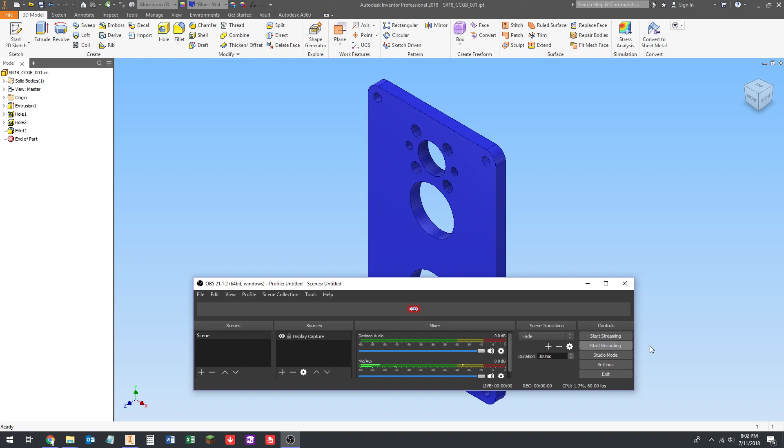Alrighty, we're back. Took a little break, got a drink of water, ate a bagel. Now we're back.

Okay, so I said in the last video that I was going to go right into modeling the standoffs and the other parts for the gearbox, but I realized I think it would be more valuable to go through more the process that I would follow in a season rather than what we did in the actual in-person class sessions. In the in-person class sessions, I just gave you guys the dimensions for the parts, and that was to save time, give you guys more time to actually work on some modeling. But here, we're not tied to a hard and fast time thing, so I would like you guys to see exactly how we go about determining these dimensions and how that will look in an actual build season design session.

So what we're going to do is we're actually going to download our off-the-shelf parts, at least a few of them. We're going to download the gears, the bearings and the motor. We'll leave the fasteners and some other stuff that we're going to need until a little later. I'm going to show you guys how to import those. We're going to save them, set all the materials, and then we'll work on modeling the rest of the parts.

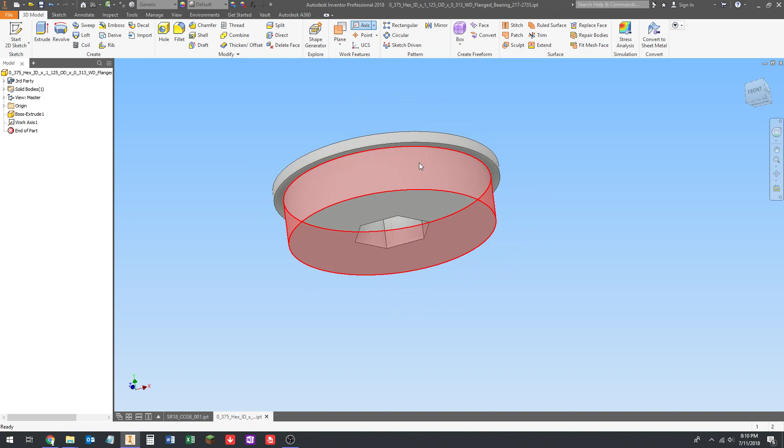Okay, so there's a little bit of prep that has to be done for each one of these files. This is the model of the bearing. I want a work axis that goes through the middle of it because it makes it a little easier to constrain to shafts and stuff. So I'm going to click Axis. Right here we're on the 3D Model tab. I'm going to click Axis. I'm going to find a cylindrical surface on this. I'm just going to use this cylindrical surface, and click. Okay, and it places this little orange line in the middle, and I use that orange line in assemblies to place constraints.

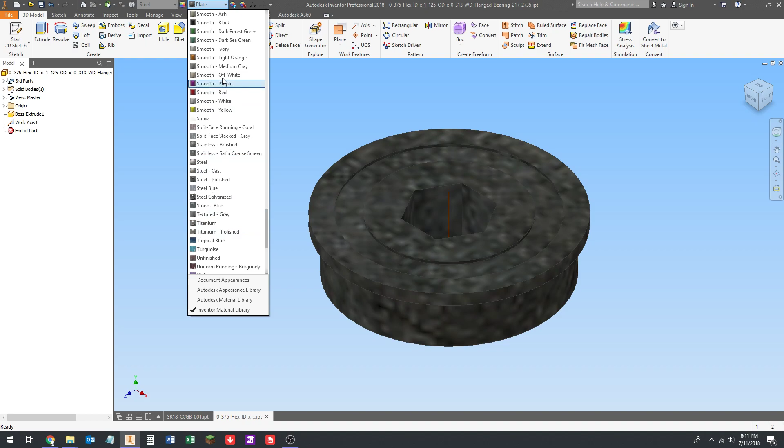Next, we need to set the material. So if we click the drop-down list up here where it says generic, scroll down until we get steel. Now Inventor does this really rough steel texture that just doesn't look good, and it's confusing when you're looking at it in assembly. So I typically reassign to something more polished. There's one that I like called semi-polished. Okay, and this looks more like what the bearings look like in real life. Alright, so I'm going to give this a save.

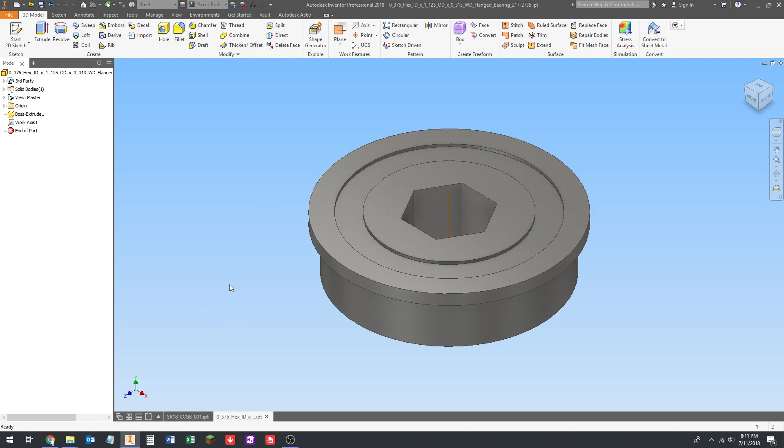Now, it didn't create the Inventor part until I clicked the Save button. So if I had closed out this part before I saved, I would have had to start that process over again. It does not create the Inventor file when you import it. It creates the Inventor file when you save it. So just keep that in mind. I'm going to close this because I don't need it anymore.

I'm going to go back and open again. I'm going to go to the next one. We've already done this one, so we're going to do this one. Open. Okay. Wait for it to import. Click OK. Delete the extra sketch. Place the center line. Change the, oops, clicked on the wrong one. Change the material. Ooh, what's going on?

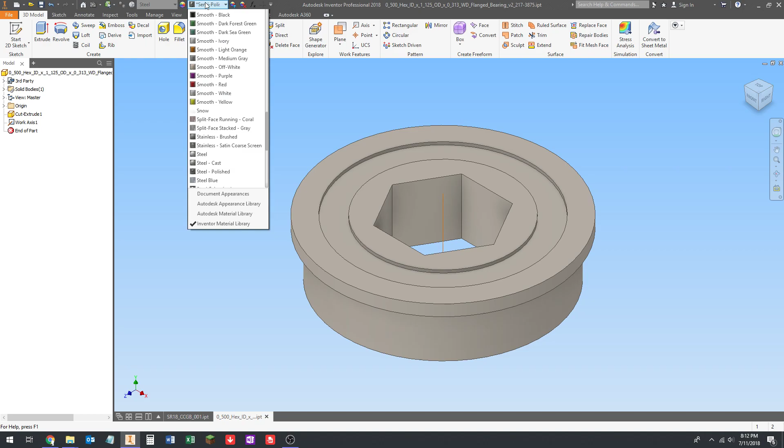That is strange. Let's go. Pick something else here. There we go. That was weird. Okay. Semi-polished. Yes. Okay. Now I'm going to give it a save. Close it. Open. Go to the next one. So you can do these pretty fast. Next one's this one. Open.

I'm kind of trying to talk about what I'm doing just because you can't hear my mouse clicks. I was hoping the mic was going to pick up the mouse clicks so that you could know when I'm clicking, but it doesn't. In the screen cap software I'm working, I haven't figured out how to do a little flash on the mouse when you do it. I'll figure that out later, but I'm kind of in a hurry to get these videos done.

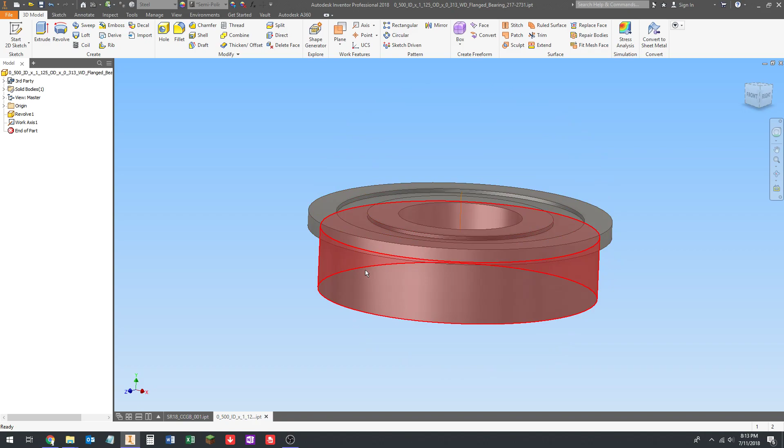So, steel, semi-polished. Let's save. And the reason we're setting the material is so that we get a somewhat accurate weight. Now, if you really wanted to be accurate, obviously this bearing is modeled just as kind of a solid lump, right? And that's just because you don't need to model all the individual balls inside of the bearing. You don't need to model the inner race and the outer race. There's just no reason to do that.

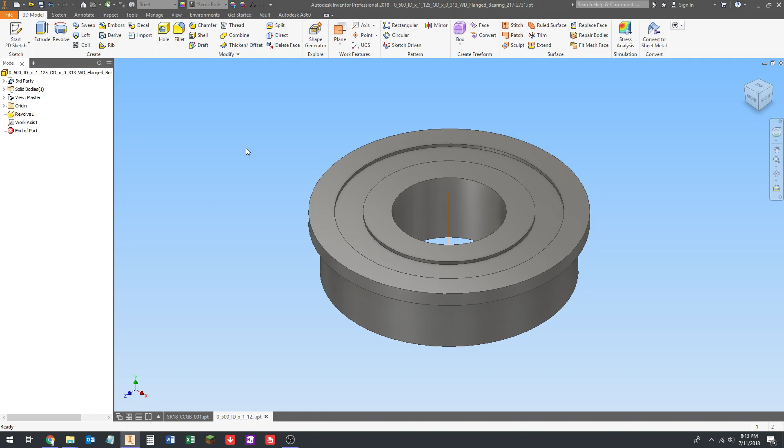But that means that the real bearing is made of a couple different kinds of steel, and it's hollow basically, and so the weight's going to be slightly different. So if you really cared a lot about the realistic weight of the bearing, you'd want to go in and set the material or the weight manually instead of letting Inventor calculate it automatically. You'd want to set it to whatever the bearing actually weighed. And I'll show you how to do that because we're going to have to do it for the motor. But the bearings are so light and the difference isn't that big that we don't care.

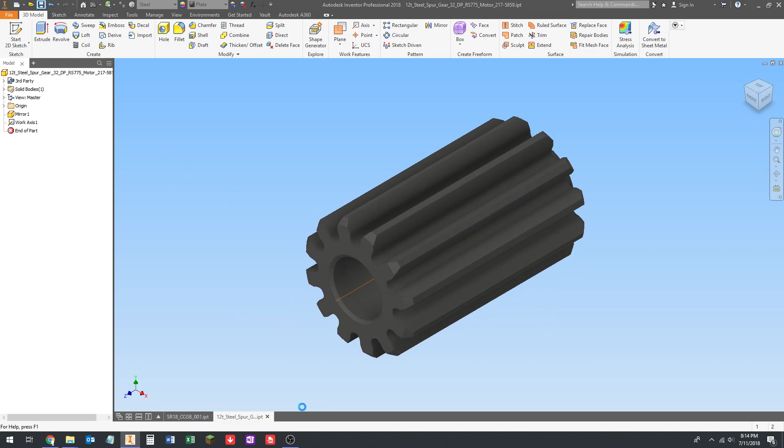Okay, so we just imported our gear. These are going to be a little bit different because, well, no, this one's actually not, because this is steel as well. I'll delete the sketch, place the work axis, set the material to, oops, I said it wasn't aluminum, steel. Okay, I'm not going to change the appearance on this because this is pretty much the color that the gear actually is. It's kind of black. Give it a save. Okay, open. It's going to be the 16-tooth aluminum.

Okay, so this one, a little different in terms of what we're going to do here for materials. So delete the sketch. Now, this one's a little weird because the hex, it's not round on the outside. Obviously, I can't place this work axis on the hex, so I've got to find a cylindrical surface, right? And it doesn't matter what cylindrical surface it is as long as it's concentric with the center line of the gear. So I have a few options.

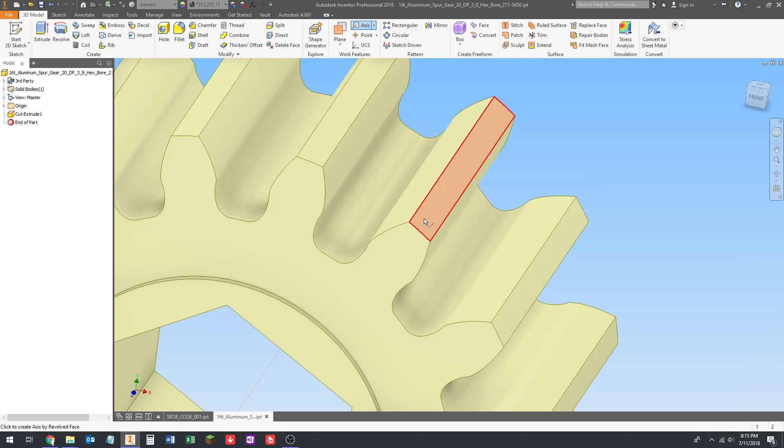First of all, the ends of the teeth happen to be a cylindrical surface. It looks like it's straight, but it is actually curved, and the center of that curve is the center line of the gear, okay? The other option is this little hub, little boss on each side. That's a cylinder on the outside. So that's what I'm going to use, but it really doesn't matter what you choose. As long as you get a center point, you're good to go.

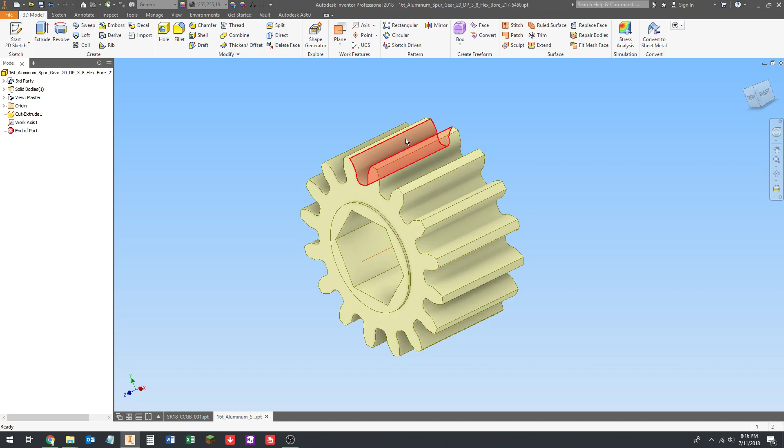Okay, so now gear models from Vex come in with a color, right? You can see up here, you've got these numbers. It's the RGB value of the color of the gear, and it's not one of Inventor's materials, and it's not default like the bearings were. So normally when you pick a material, Inventor automatically changes the color. All right, but if there's already a color associated with the step file, Inventor won't do that. So I will get back to that in a second. I'll show you how to override the default color and get rid of it so Inventor can specify the color. So we're going to click this drop-down list.

So if we go to, there's these different libraries down here. I typically use the Inventor library just because it has a few basic materials, but if I'm doing something that needs other materials, there is this other material library, which I hardly ever use, but it does have a bunch of different kinds of aluminum, including 7075.

Okay, so we want to get rid of the default color. So if you go over here to solid bodies and you click on the little arrow, okay, that expands it. Then you see where it says solid 1, right click on that, go down to properties, okay, and you get this dialog box. Now you need to do two things.

So you're going to click this drop down box, you're going to scroll all the way up, click as part, and then you're going to click clear all overrides. Then you're going to click OK. Okay, and you'll notice all of a sudden Inventor automatically picked an appearance when we picked aluminum 7075.

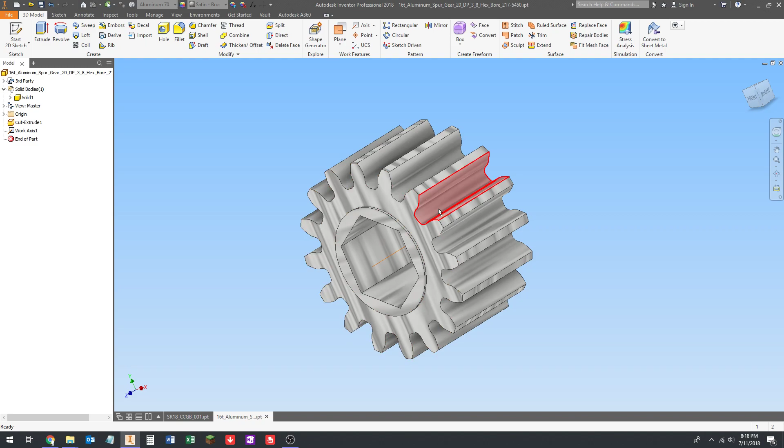Now this is a pretty ugly color, and I don't like it, so we're going to change it. The coating that's on those gears makes them kind of beige. So actually the default color would have worked. You know, it's pretty close to what this was, but we're going to go ahead and change the color anyways, just so that you guys can get the practice.

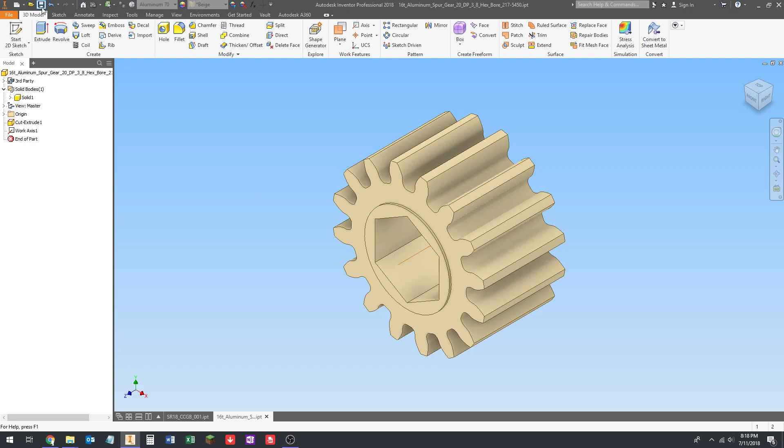So we're going to save that, close it, go to the next one. And now the remaining gears are going to be the same material and the same color, just for simplicity. I think the 32 DP gears might be a slightly different color. I don't quite remember. So delete the sketch, place the work axis,

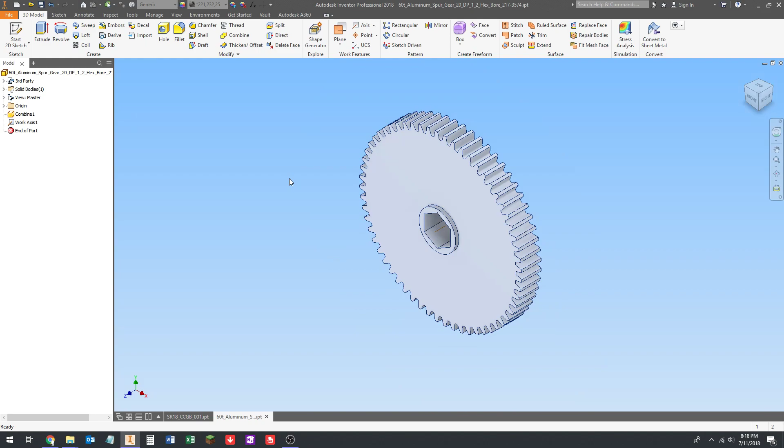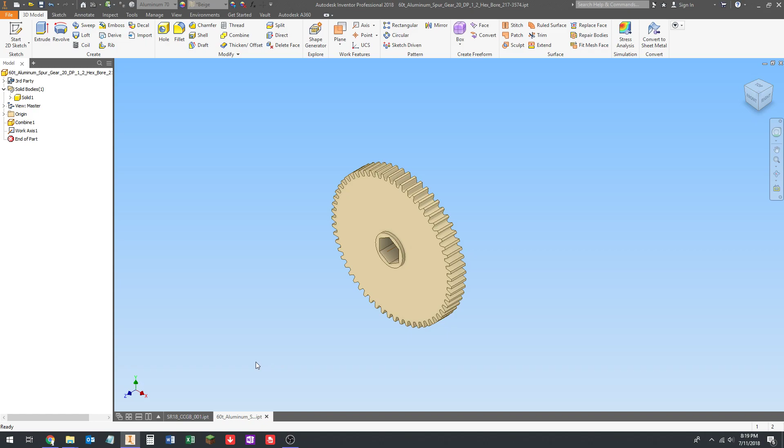set the material, change the override, set the appearance to beige, and save. Close that. Okay, we got one more gear. Open that. Click OK. Delete the sketch. Place the axis.

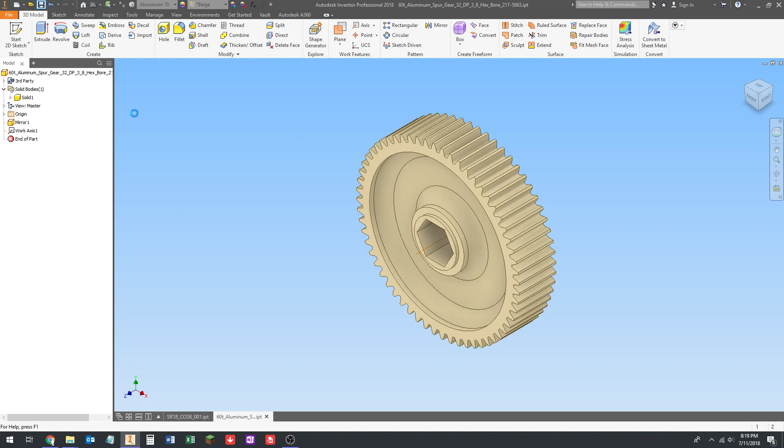Okay. Change the material. Expand that. Right click on solid 1. Go to properties. Go to as part. Check clear overrides. Click OK. Select the color we want. Save.

Alright, now one last imported part. It's going to be the 775 Pro motor. So in this one, okay, I'm going to go ahead and set the material to steel, and I'm actually going to go to the Inventor material library for this because I don't care about the alloy. The motor. Well, all right, let's look at this here for a second. The motor is modeled as a solid block.

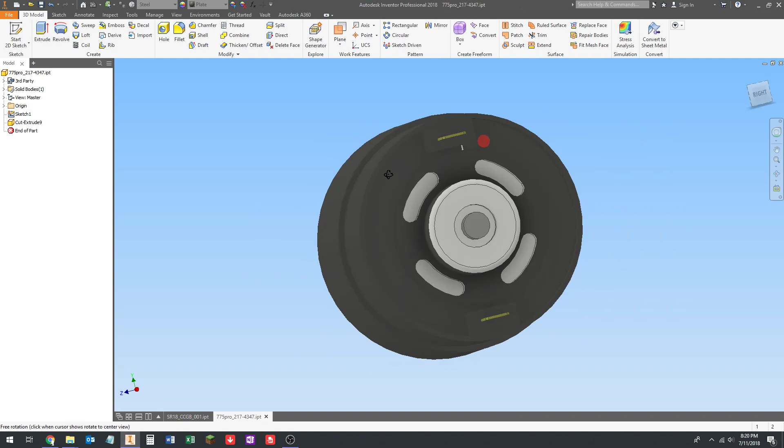Now, in reality, the motor is not a solid block. There is empty space inside of the motor, and in addition, there's a significant amount of other materials. There's a lot of plastic parts in the motor. There's a significant amount of copper in the motor because of the windings. There's different kinds of steel. You've got bearings that have empty space in them. So the bottom line is, modeling this as a solid lump of steel is not a good way to accurately represent the weight of the motor.

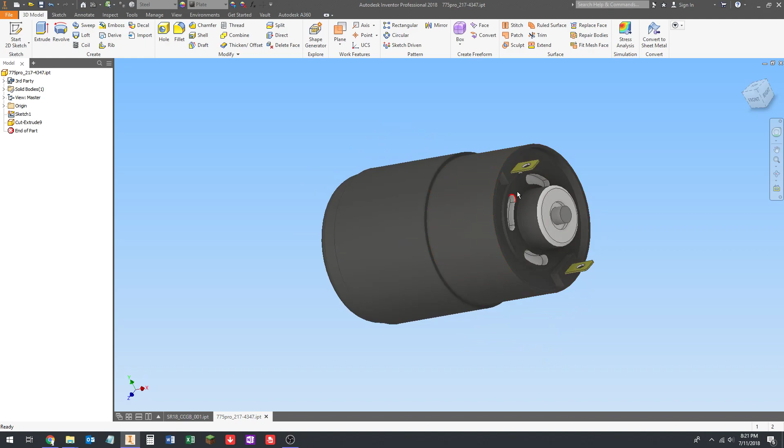So what we've done, we've selected the material. We're going to leave the appearance alone because it's nicely colored when it comes in from Vex, and you've got the brass or copper connections there, so it looks nice. We're not going to change the coloring at all because I like the way it looks. But we do need to change the weight manually. We set it to steel just for consistency, but we're going to have to manually override the weight to make it what we want.

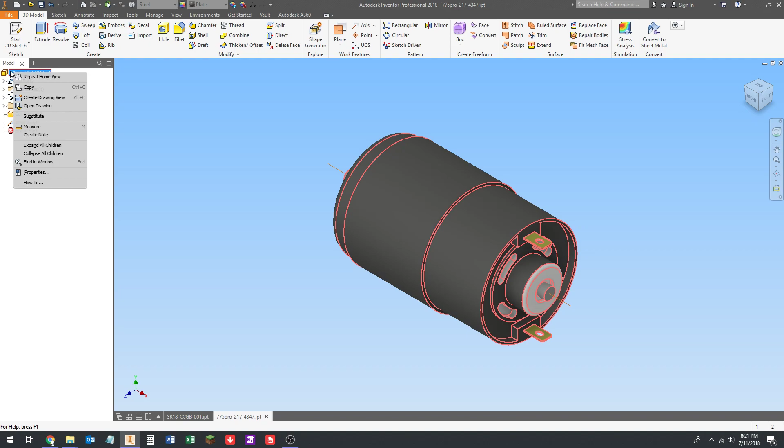So what you do, I need to do a couple things here first, actually. Delete the sketch, and I'm going to place the centerline axis on this as well for constraints. Okay, so to manually override the weight, we're going to go up here in the browser, right-click on the title of the part, the very top, go to iProperties, go to the Physical tab, and we're going to update.

Okay, now if this was as modeled, a solid piece of steel, it would weigh 1.657 pounds mass. Now in reality, this motor is 0.8 pounds, according to Vex's website. I can pull that up, go back to the website and go to weight. It says 0.8 pounds. So what I can do here is manually override this box and type in 0.8, and hit update again, and it will set this to that weight.

And now it's manually overridden. It's going to stay this way. If I go in and update again, it's not going to change. Now, if I want to go back to the default weight, you just delete the text out of here and update again, and it'll go back to its automatically calculated weight. So you can flip back and forth if you need to.

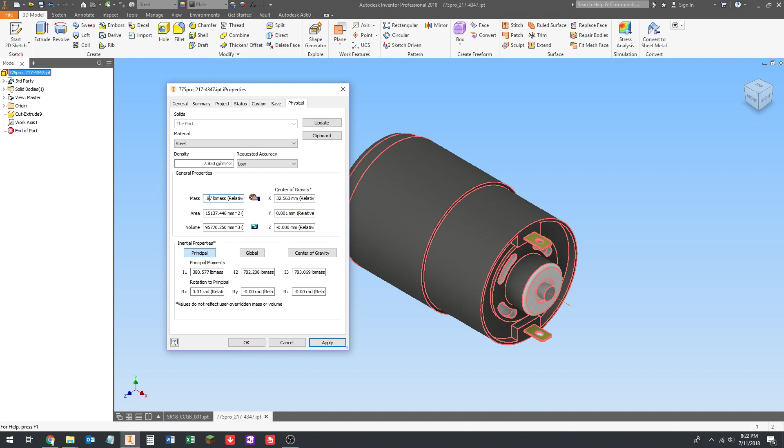But 0.8 pounds is what we want. Update. Click OK. Okay, so now when this is put into an assembly, it'll show up as the correct weight. So we're going to save this, and we are done importing parts for now.

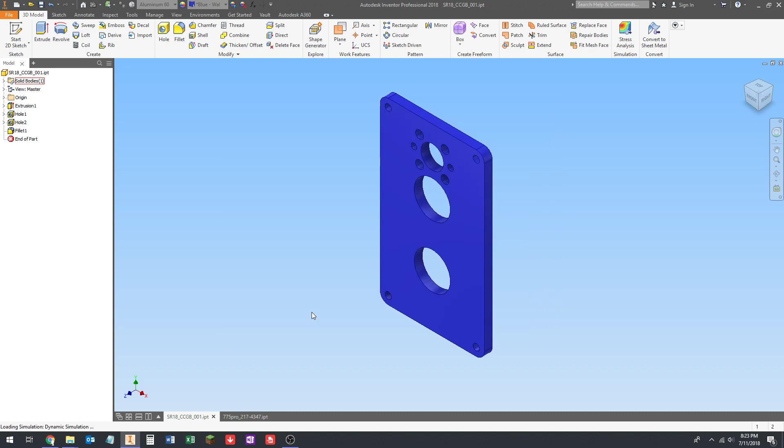Okay, so what we're going to do next is we're going to use some of the imported parts that we have available to us at the moment to start assembling. So we're going to go up and click New, and we're going to go to standard.iam, which is the standard assembly template. We're going to click Create, and once it loads, we're going to be presented with a blank assembly.

So we're going to go up and we're going to click Place. We've got to place parts in here. We did this a couple weeks ago in the class, but I'm going to kind of go over the basics here again. I'm going to browse to my parts. I find it helpful to look at large icons because Inventor gives me a nice preview and shows me what the parts are. So we want to start with our plate.

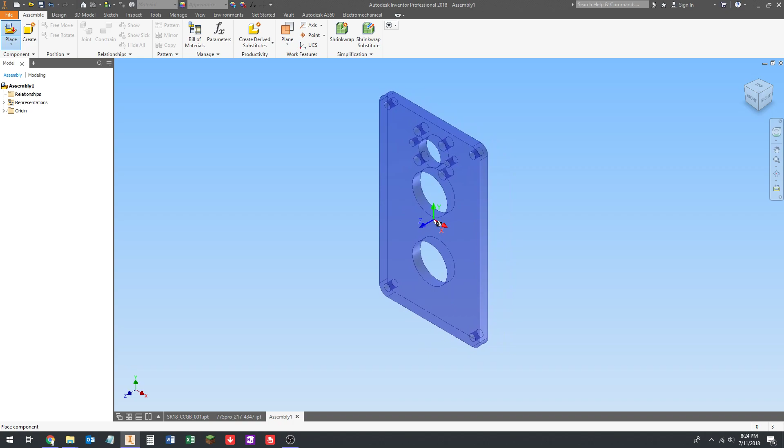In the class about assemblies, we talked about grounding your parts, and the first part you place should typically be the one you ground. So we're going to select this part. We're going to click Open. I need to zoom out a little bit here. This orientation is fine, so I'm not going to rotate it. Now I'm going to right-click, and I'm going to click Place Grounded at Origin. Now this part's grounded. It can't move. Everything else in our assembly is going to be based on this plate.

Now there's two plates in the gearbox that are going to be separated by a couple inches or something. So I'm going to just place another one down here, and they're not really aligned, but we got two plates. So now I'm going to hit Escape. I'm done placing parts. Now this part can move around. This part cannot move around. This weird highlighting thing is a setting that I have changed myself. It makes it a little more convenient to work, I've found. So when you select something, it won't look exactly like this, but don't worry about it.

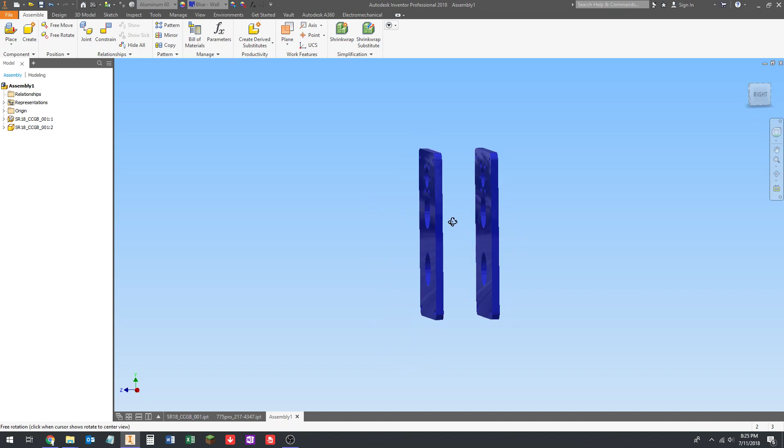Now the big point that I wanted to make was we don't know the distance between these two plates. We don't have any way to know that right off the bat. Now we could sit down and maybe figure it out, but it's easiest for what we're doing here. We can kind of use Inventor to help us figure out how wide it needs to be.

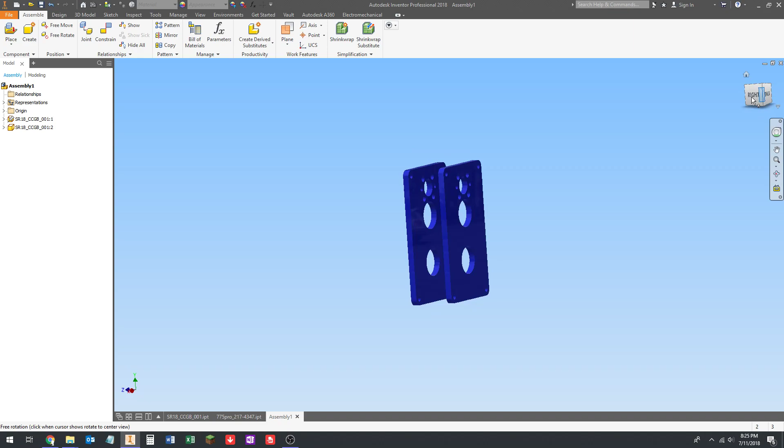So we're going to start assembling, and we're not going to know how far apart these two plates are. Right? We don't know how long the standoffs are. We don't know how much space we need. We're gonna make this as thin as we can, while still having room for all the components. So we're gonna start assembling, and we'll figure that out a little later. So we're gonna start by placing in our motor.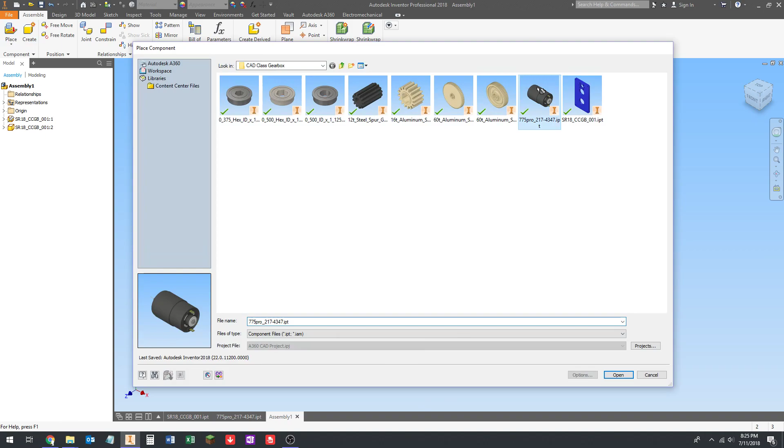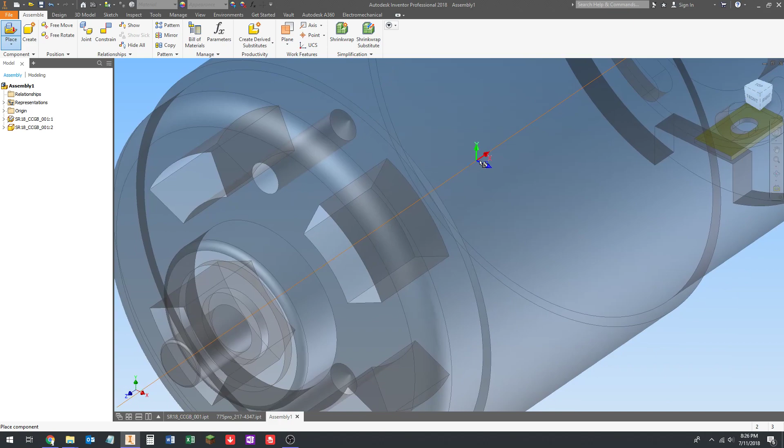I'm gonna rotate this to be a little bit more convenient. Remember, the rotations obey the right-hand rule. So positive 90 degrees around the y-axis. We'll rotate the motor like that. Now we want to roll the motor to make the two bolt holes, which you can see right there, horizontal. So we're going to do a rotation in the x-axis, and that flips the motor kind of upside down.

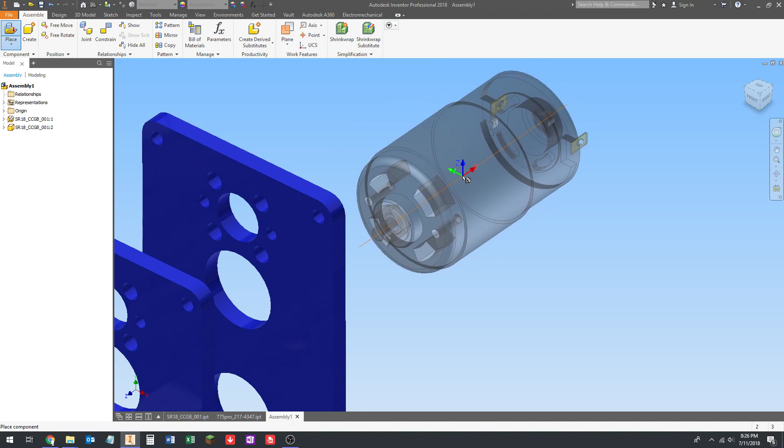Now you can see the origin right where my mouse is. The motor's really upside down. There's no reason that that's a problem, but typically I just rotate it 2 more times to flip it upright. So the holes are still horizontal, but the origin is the way that makes more sense. There's no real reason for that. It's just what I do. So we click just anywhere, place that down, then I press the Escape key because I'm done.

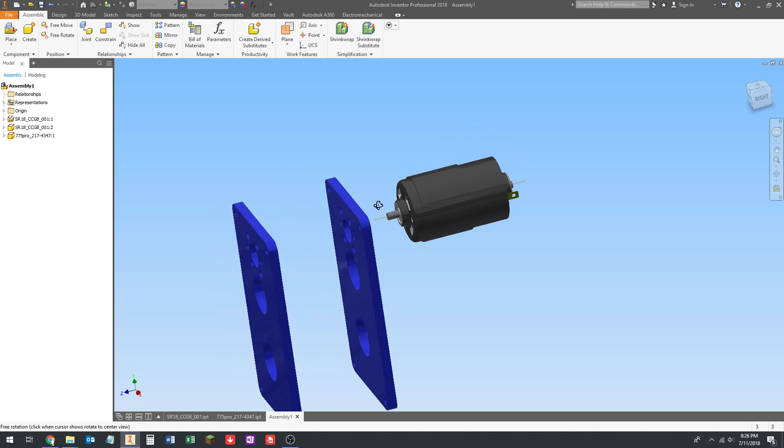Okay, so now we're going to constrain it. So we need to do a couple things. We want the center line of the motor, which is represented by this work axis that I created when we imported the part, to be centered on this medium-sized hole here. So we're going to go up and click the Constraint tool. This dialog pops up.

We're going to click the work axis, and then we're going to click the inside of this hole. And you'll notice the motor jumps and lines up with it. We'll click the Apply button. You can also hit Enter.

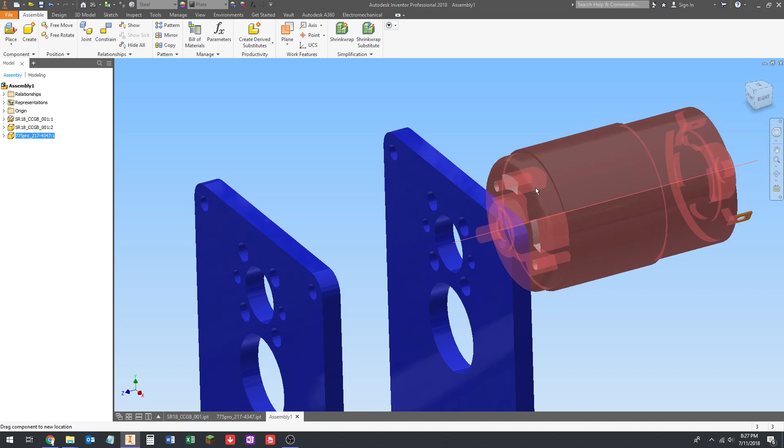Okay, so now if I lined my holes up correctly, I did those holes from memory, so we will see. Well, let me show you here. So I'm going to press the Escape key to get out of the Constraint tool. This motor can move in and out, and it can rotate. Okay, we want to prevent both of those things, so we need two more constraints.

So we're going to line up one of these holes with one of the screw holes in the plate. Okay, so we're going to click Constraint. We're going to go in and select the inside of this cylindrical hole surface. Go in and select the inside of this hole surface. That'll line those two up. We're going to click Apply.

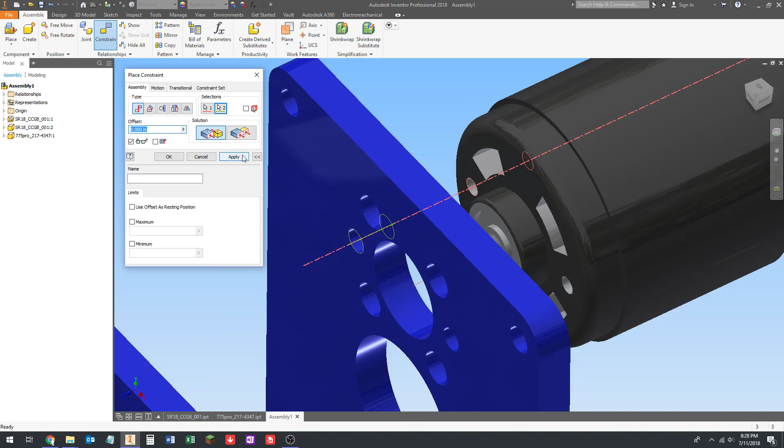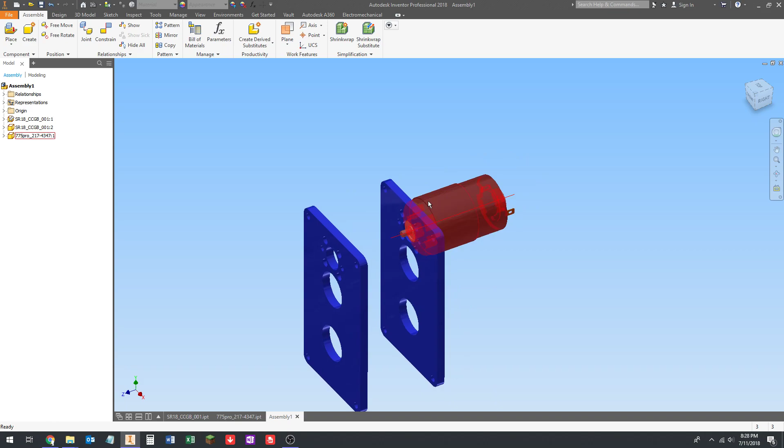Then we're going to click the front face of the motor. That's one constraint. We're going to rotate around. We're going to click the back face of the plate. And we're going to click Apply. Okay, now if we escape out of the Constraint tool, we can't move the motor now, right? I'm clicking and dragging it, and it won't move. That's good. It's fully constrained. It's locked in place.

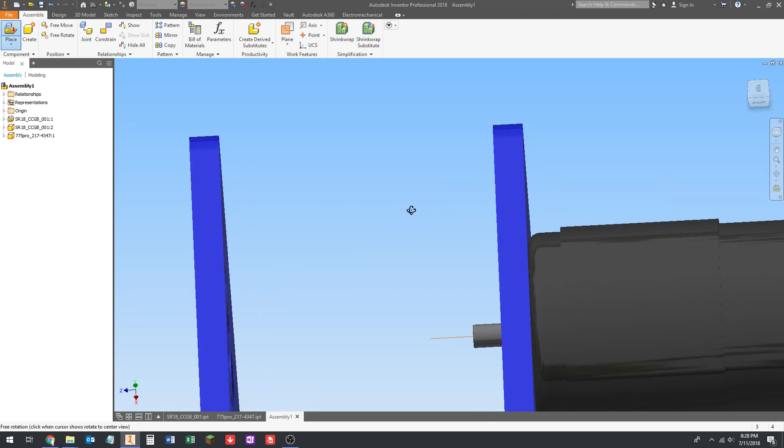Okay, so now there's a gear that goes on this shaft. So let's go up to Place, and let's get the gear, which is this guy here, and click Open. Okay, now the gear does have a back side, so you can see here, if I look at it from the side, you can see the little hub that's right there on the right side, the little bit that's sticking out beyond the gear teeth. That side faces the motor. Okay, and that just helps space the gear away from the motor a little bit.

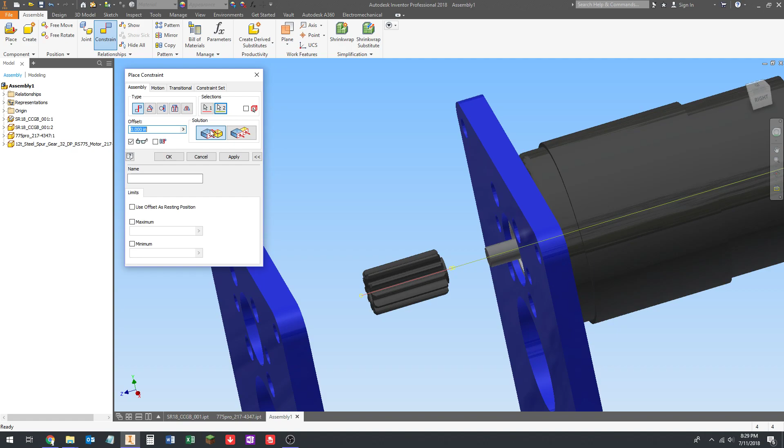So we're going to place this down just anywhere. It's just floating in there. It's not attached to anything. We're going to press Escape because we're done placing components. Now we're going to constrain this to the motor shaft. So we're going to click the Constraint tool. We're going to click the work axis on the gear and then the work axis on the motor. And that will line those two work axes up. Okay, we're using the mate constraint, which is the default one.

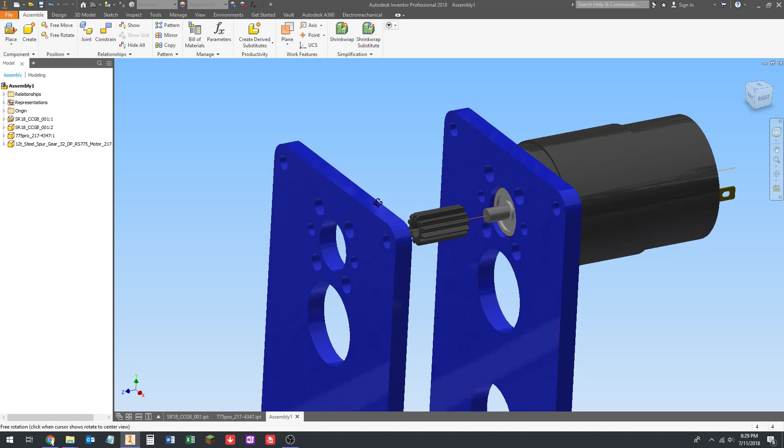Click Apply. Okay, so now we have 2 degrees of freedom, is what they call it. The motor gear, the pinion, can rotate and move in and out, just like the motor could a minute ago. So the first of these is easy to solve. We go to the Constraint tool, we rotate around, we click some flat face at the back of the motor, and we click this surface here.

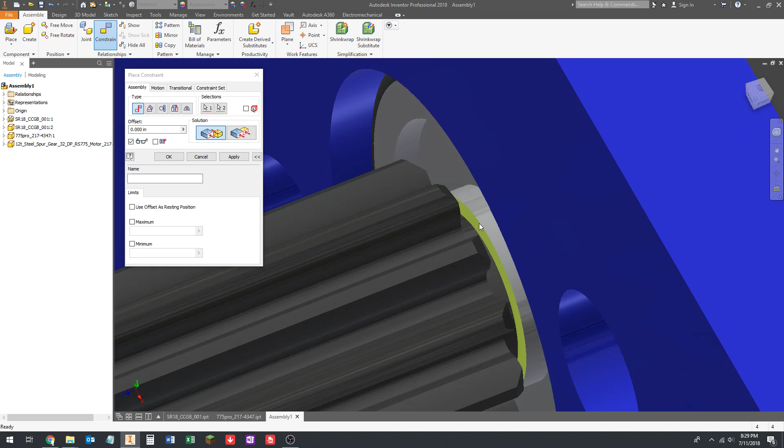Now this is a bushing, or maybe a bearing on this motor. I don't remember. But we don't want to press that all the way on, because when you press it on, if you press too hard, you can damage the bearing. So we want a small gap in between here, just a few thousandths of an inch. So I'm going to type in the offset box 0.01. That's 10 thousandths of an inch.

And that makes, it's hard to see, but it makes a small gap between these two surfaces here, which is more realistic. You don't have to do this. I mean, 10 thousandths of an inch isn't much, and this gear is going to be longer. You can kind of fudge gears side to side a little bit, especially in FRC, because it doesn't matter that much. But I do that just for realism.

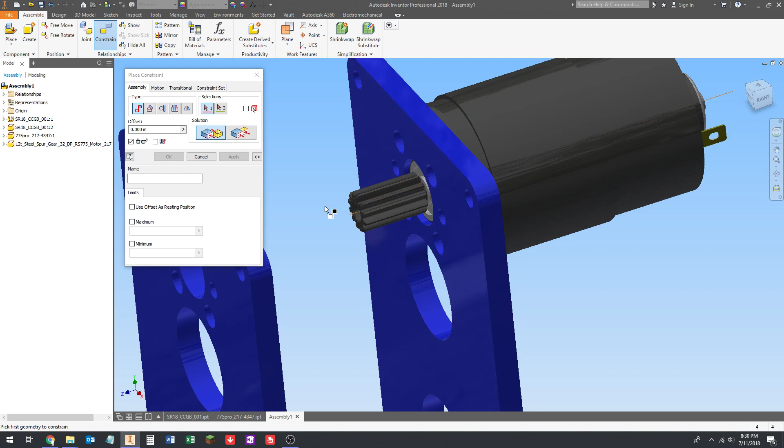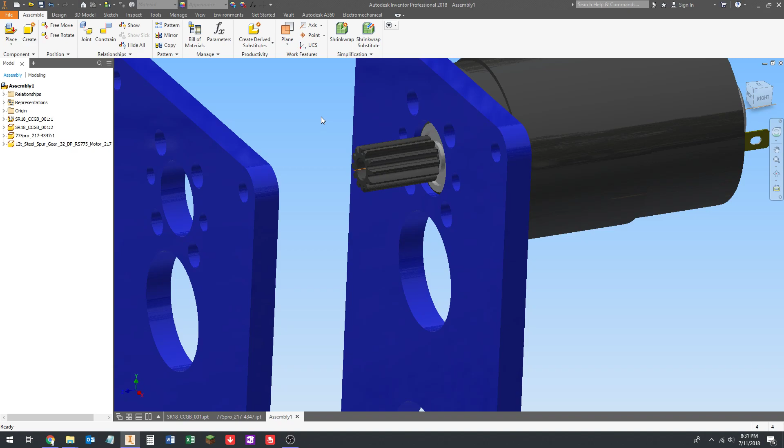Okay, now our gear can still spin, but we don't care. The motor shaft spins in real life. Obviously, there's no easy way to constrain this to stop it from spinning, and we just really don't need to. So I'm going to let it spin, and that'll be fine. That won't hurt anything.

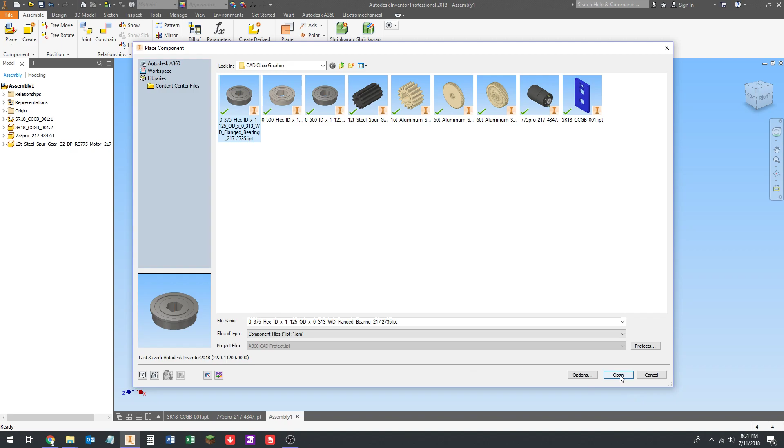Okay, so now we're going to go ahead and put bearings in these holes, the top 2 holes. So I'm going to click Place, or actually, I'm going to right-click and click Place Component here. You can do it that way as well. And then I'm going to find my 3/8 hex bearing, which is the one that goes up here. I'm going to open. So the flange needs to be on the inside of the gearbox, so I'm going to rotate once around the x-axis.

Remember, it obeys the right-hand rule. I'm going to rotate once about the x-axis. Now that puts the flange facing in, so I'm just going to kind of place this in here, right? That's the direction it'll go in, that hole there that it's kind of lined up in the viewport.

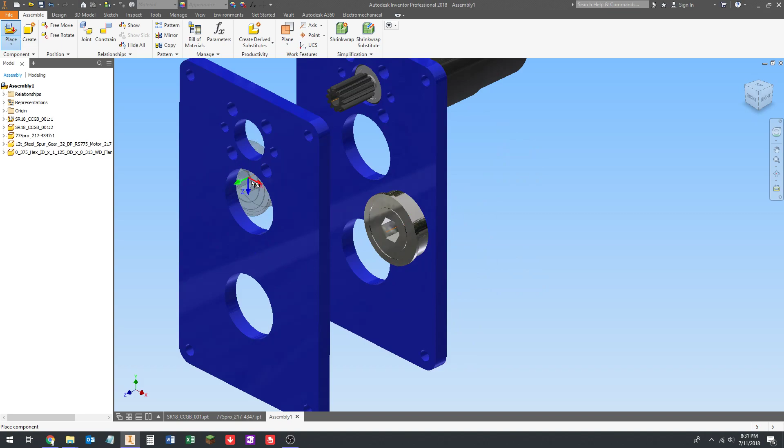Now the other bearing on this plate over here in this hole, oops, will be the other way around, right? The flange will also be in, so it needs to turn 180 degrees. So I'm going to rotate, well, I'll rotate by the Z-axis twice.

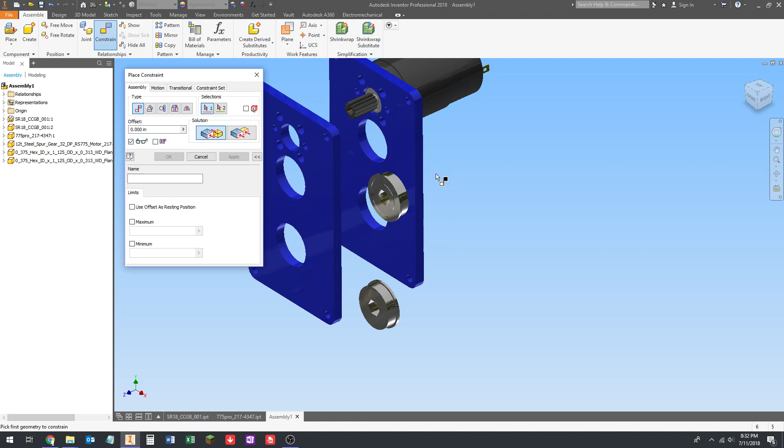That'll flip the bearing around. I'll place it down here. Then I'll press Escape to get out of that tool. All right, next I'm going to pick the Constraint tool. I'm going to pick the cylindrical surface of this bearing and the, oops, that's the wrong hole, the inside of this top hole here. Okay, line that up.

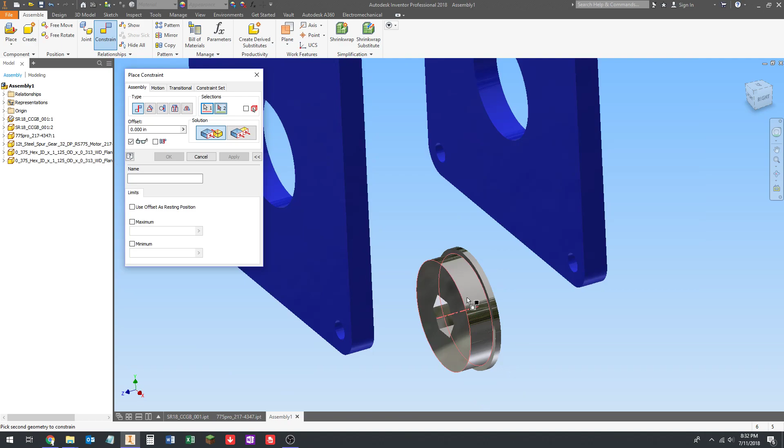Then I'm going to go to the other bearing and do the same thing, pick the cylindrical surface there and the cylindrical surface of the hole. So I need to be able to select the back side of this flange. And if I'm careful, I can get in here and get really finicky with it and zoom in and be able to pick the back, right? But if I exit out of the Constraint tool, I can just click and drag and pull this out, pull the other one out, and that'll make it easier to grab. Then I can go back in the Constraint tool and continue constraining.

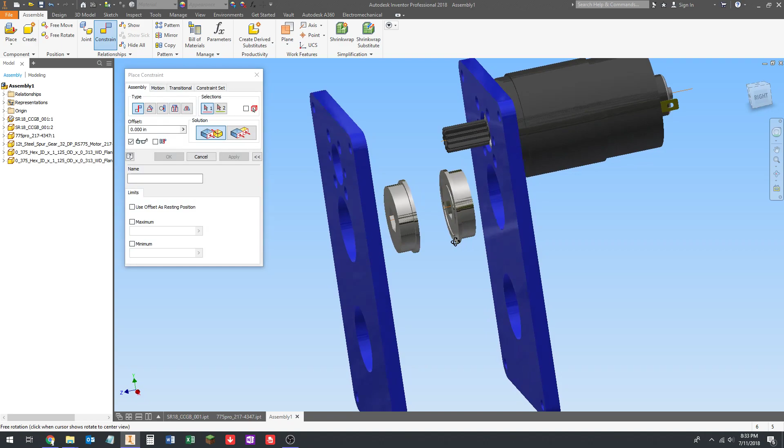Okay, so I'm going to pick the inside of the flange. I'm going to rotate, pick the front of the plate, click Apply, or press Enter. Click the back of this flange and the front of this plate, and press Enter. Okay, now same problem as with the gear, the bearings can spin. They can't move in and out, or side to side or up and down. They're constrained in the hole and on the plate, but they can spin.

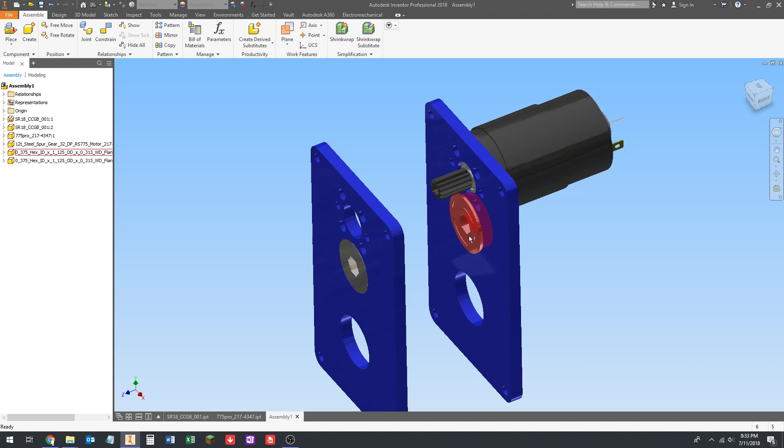That's fine. Same deal with the gear up here. They spin in real life anyways, and there's just no reason to go to the work to constrain it. It just slows down your model, and obviously takes time to do it. So no reason to mess with that. So those are our bearings.

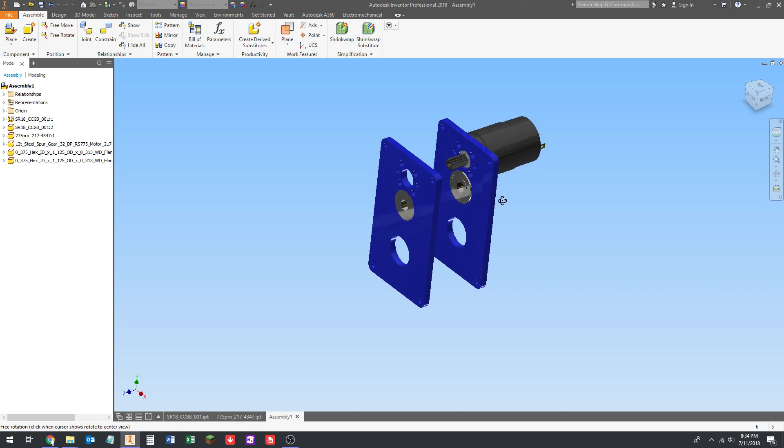Now there's a shaft that goes in here, right? There's a piece of 3/8 hex shaft that goes in here, but we don't need the hex shaft in here to constrain the gears. So we're going to go ahead and place the gears for this cluster shaft in this assembly, and I'll show you exactly how that works. And this is a workflow that I would use during the season pretty typically.

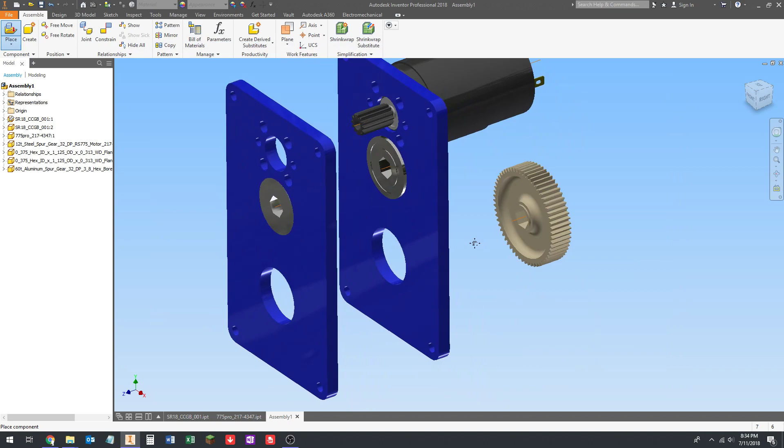So I'm going to go to Place, and I'm going to grab the 60 tooth 32 DP gear, which is this guy. Place that down. I'm going to hit Escape. I'm going to go up and place another component before I start constraining. And I'm going to grab the 16 tooth 20 DP gear, place it down as well, and hit Escape. So now I'm going to go to the Constraint tool. You can also hit the C key on your keyboard for the Constraint tool if you want.

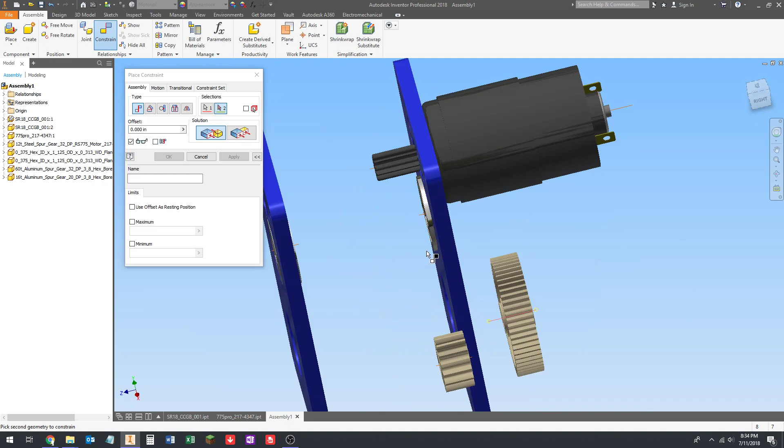So I'm going to pick the work axis there and connect it to the work axis there. There's no shaft in there, right? But I'm lining the centers of the gear up with the centers of the bearing, which is the same thing. And I'm going to line the center of this gear up with the center of this bearing using the same method. And I'm just pressing the Enter key after placing each of those constraints because I find it a lot faster. So I'm going to exit out of that with the Escape key, pull these out so I can get to the back.

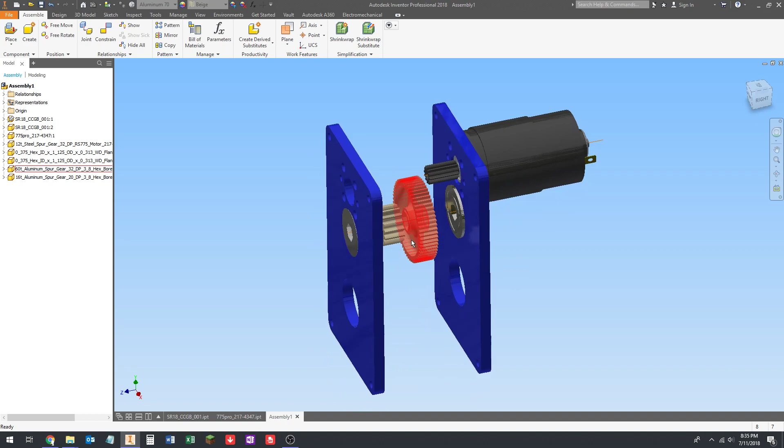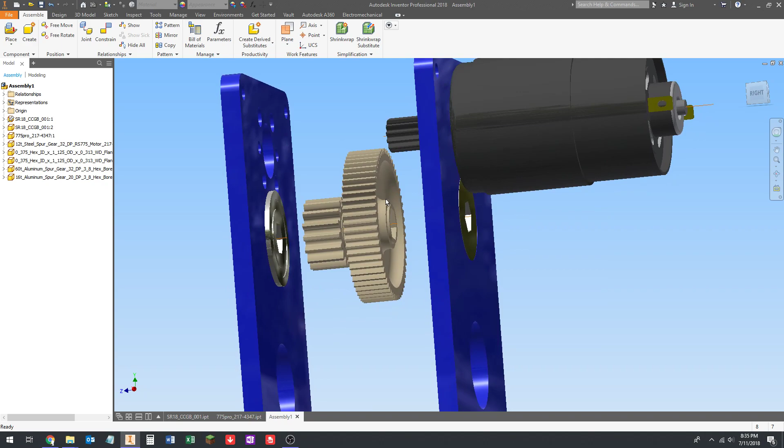When I'm modeling typically and I'm going quickly, I don't move things when I'm constraining them. But for beginners, it's going to be easier if you do that, just because you won't have to struggle to find an angle where you can select the surfaces you need to select. So it's up to you. Once you get comfortable at it, do what works best for you. When you're modeling a really complicated assembly, you're going to want to find methods that cut down on time and mouse clicks as much as possible.

So go back into the Constraint tool. I'm going to select the back of this gear. We're just going to butt this gear right up against the front of the bearing. And because of the design of the bearing and the design of the gear, we don't need to have any space between the bearing and the gear, kind of like we did up here. Also, there's no pressing, like this gear gets pressed on, so that's why I was concerned about that. But we can just butt this right up against the bearing and apply.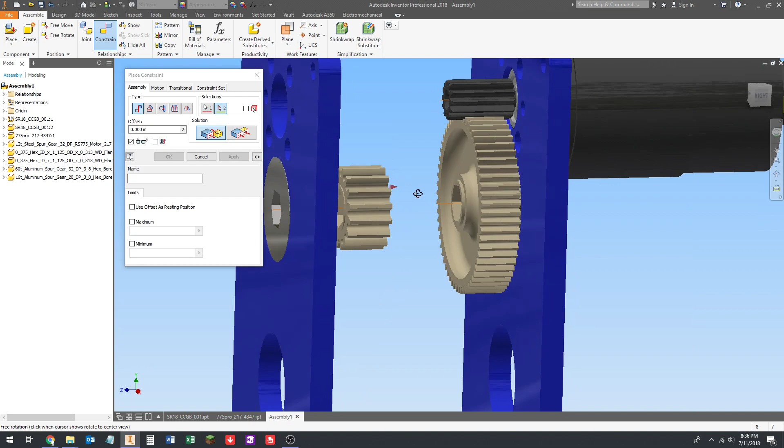Same thing with this gear. The way that we laid out this gearbox, all the gears are about the same width except for this gear up here, and I'll talk about that in a second. All the gears are the same width, so we can just butt this one right up against that one. Okay.

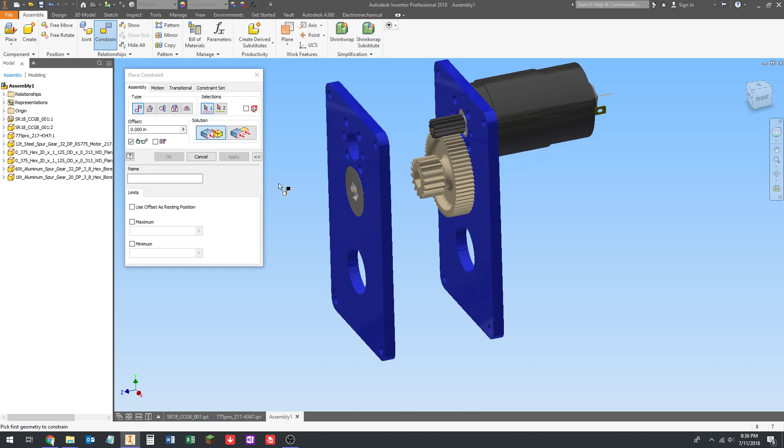Now, the next thing we're going to do is we're going to have a gear down here. So we need some bearings in here first. So let's go ahead and get those in there and get this last gear in there. And so let's go to Place, grab the last. Actually, I'm going to escape out of that. I want to do the bearings first.

So we're going to have a round bearing, I'm going to rotate this correctly. The round bearing is going to go in this hole. Escape out, place component. I'm going to grab the 1/2 inch hex bearing, and I'm going to rotate it the other direction, and it's going to go in this hole here. Once again, flanges are going to face towards the inside of the gearbox.

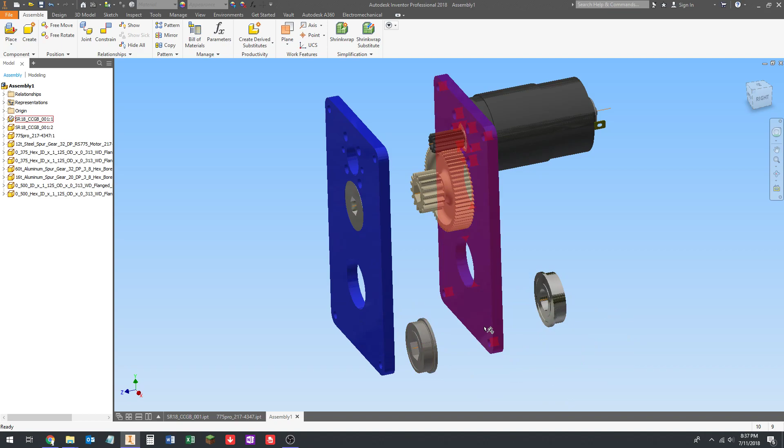Let me open this. You can open by selecting the part, right-clicking, clicking open, and it'll open the part. No. I'm just looking at the appearance of this. It doesn't look right. I'm going to make sure I selected it. Okay, it's just something weird.

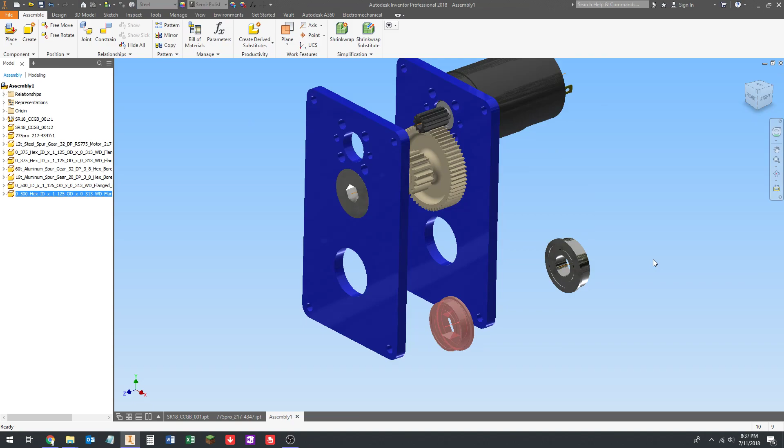Okay, anyways, I'm going to go to the Constraint tool, and I'm going to constrain these the same way that I constrained the other ones. Okay, and I'm just pressing enter between each of these. Now, I can't get to this one because it's kind of inside the plate, so I'm going to go ahead and pull these out. Go back to the Constraint tool.

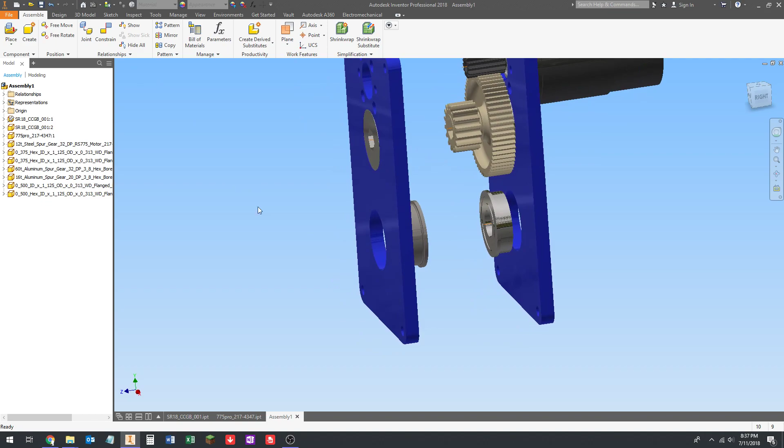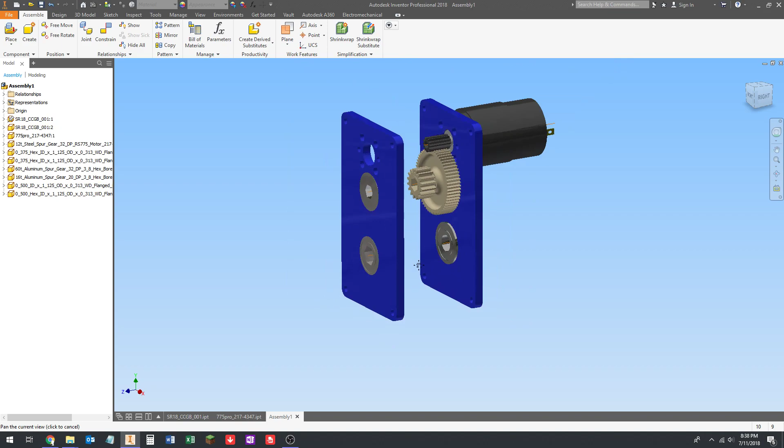I'm going to press the C key to activate the Constraint tool this time. Get around, connect the flange to the front of that plate, or I should say the inside of that plate. Click the inside of the flange to the inside of that plate. Apply. Alright, I will explain the reason for this round bearing here and this hex bearing here in the next video.

We're gonna get our last gear in here, then I'm gonna end this video, and we'll do more in the next one. So I'm gonna place a component. I'm gonna grab my 60t 20 DP gear now, open that. That angle is fine. Escape out of that.

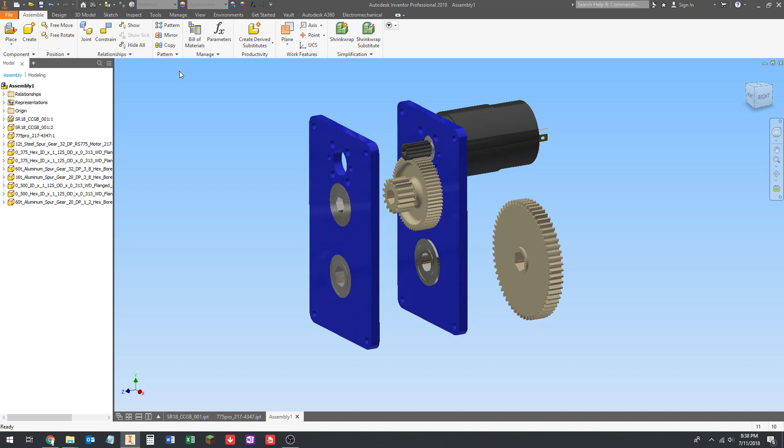Constrain tool. Now I'm going to use the center line here, the work axis, I should say, to the work axis of this bearing. Then I'm going to get in here and get this angle. We're going to attach this gear right to that bearing. Apply. Okay.

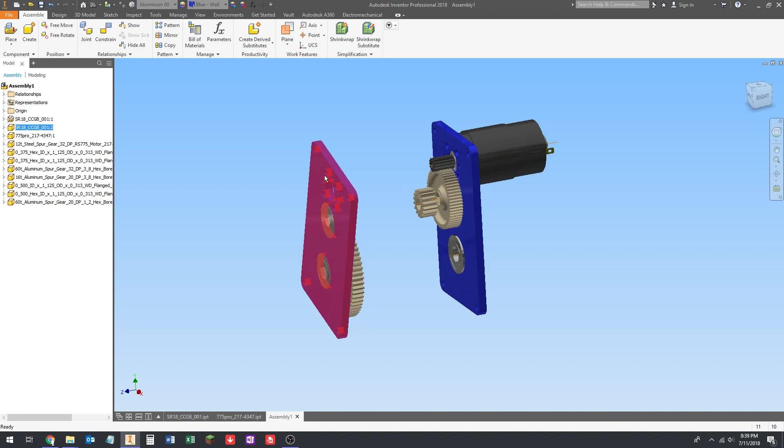This is where I guess we need to determine the overall size of this gearbox. Right now we can move this. Oh, I forgot some constraints. Okay, sorry about that. We've got a little more work to do. So we gotta line up these plates. I forgot to do that. So you know, this gear here is lined up with this plate, and this gear here is lined up with this plate. But once we line the plates up, those two will be in line.

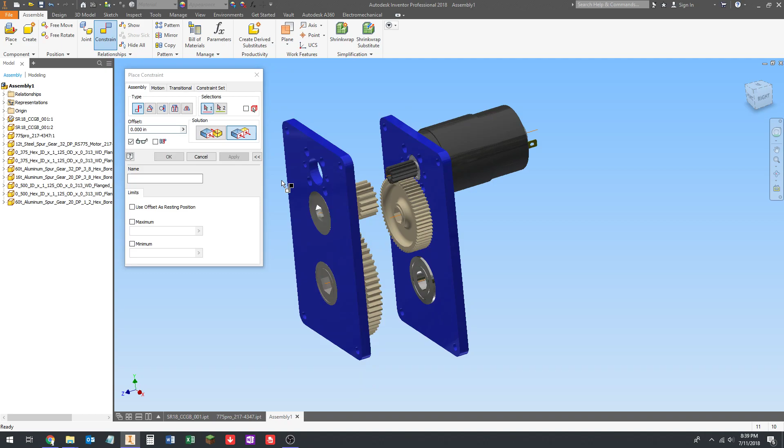So let's go back up to constraint. Now we're going to use a flush constraint, right? Because what we want to do is line the edges of these plates up with each other. So we're going to click the flush, then we're going to click one plate, we're going to click the other plate, then we're going to click apply, then we're going to click the side of the plate, the side of the other plate, and click apply.

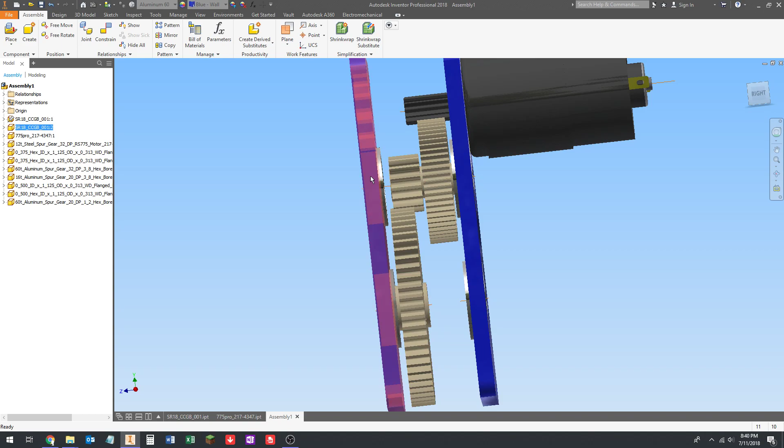Okay, now if we exit out of this, now it slides back and forth, but it's lined up perfectly, and you can kind of just push it right through other parts. There's no collision detection there, but that's fine. All right, so if we slide this closer and closer together, you can see these two gears mesh like they're supposed to, and we can go all the way to there. We can go until this bearing touches this gear. Okay, and that's what we want to do.

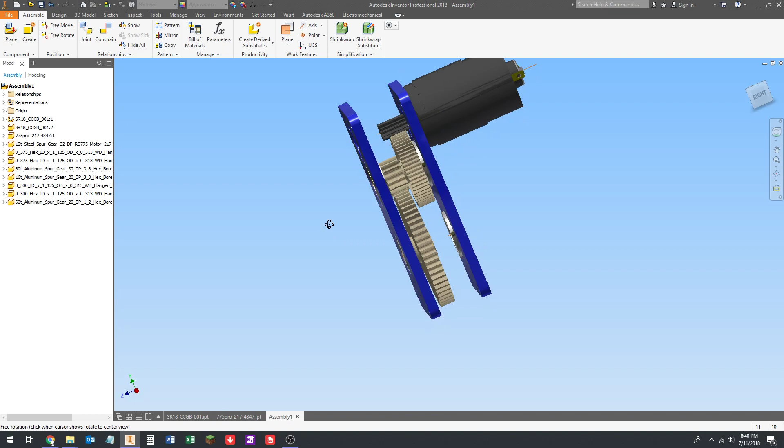So we're going to pull this back out. We're going to go to the Constraint tool. We're going to constrain that bearing to the inside or the outside of that gear and hit apply. Okay, and this is going to be the overall size of our gearbox. I'm going to give this assembly a save. Normally you'd want to save more often than I did, but we're just going to do that. That's the name of the assembly, and save it.

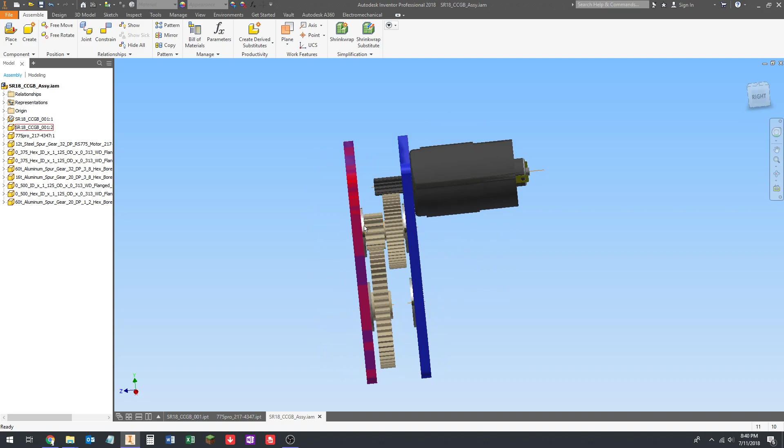All right, that constraint that we just created in here is going to be temporary. I'll explain more about that in the next video. We're going to go ahead and end it here. In the next video, we will model the standoffs, we'll model the shafts, we'll finish the assembly, we'll put in all the finished parts, and then either in that video or probably a separate video, we'll go through and we'll put all the fasteners in.